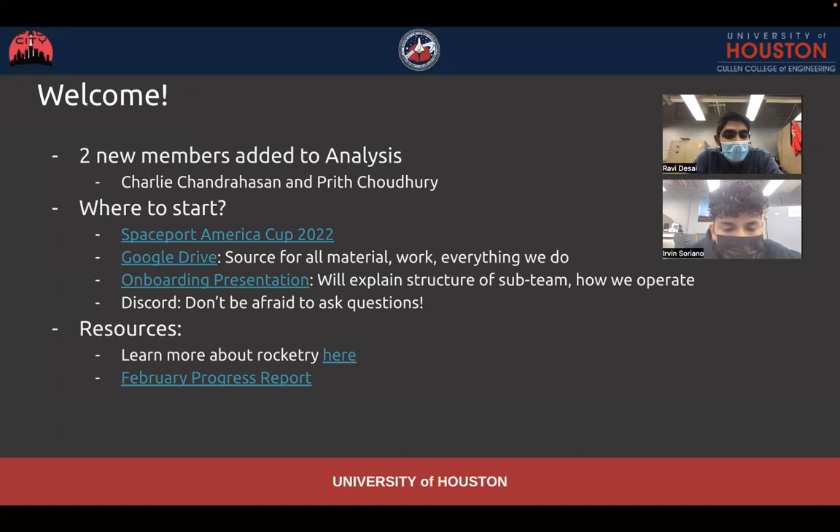The link to the Google Drive is here on the presentation - it's the source for all of our material, work, and everything we do. There's also the onboarding presentation I gave last semester, which goes more into depth about the structure of the sub team and how we operate. It's a little long and some info isn't accurate since it was so long ago, but if you're wondering how we work and get stuff done, it's a good resource.

And then obviously the Discord - please don't be afraid to ask questions. I know when I started, when Irvin started, when all of us started, it's good to just ask questions even if you think they're stupid. Don't be afraid, and we'll answer them as fast as possible.

Some more resources: I found a website, thanks to Gustavo, just about rocketry in general, with as basic or as complex explanations of things as you'd want - it's linked on the slide. And then the most recent February progress report, so you can see the recent tasks we've been working on and read about what we've completed from our PDR up until now.

Also wanted to quickly talk about our split up of analysis. We're currently split into two sub teams. The first is the design team, whose main responsibilities include CAD, FEA (finite element analysis), and CFD (computational fluid dynamics). They'll be focused not on learning NX and FEMAP anymore, but on learning the theory behind FEA.

And taking care of all the related tasks that come their way. The validation team is kind of a catch-all for everything else - they're working on apogee simulations, system validation, and occasionally mathematical models. Mainly in charge of OpenRocket, and as I'll talk about later, RockSim. Anything else that comes to mind for the team falls into validation.

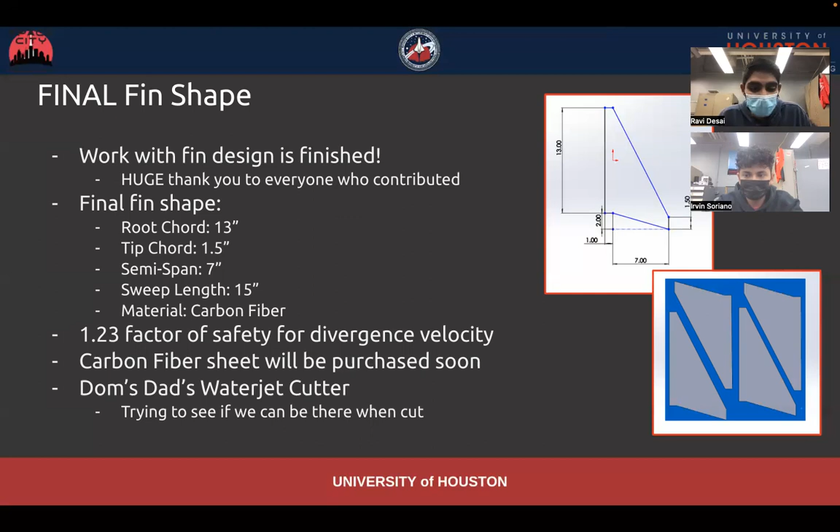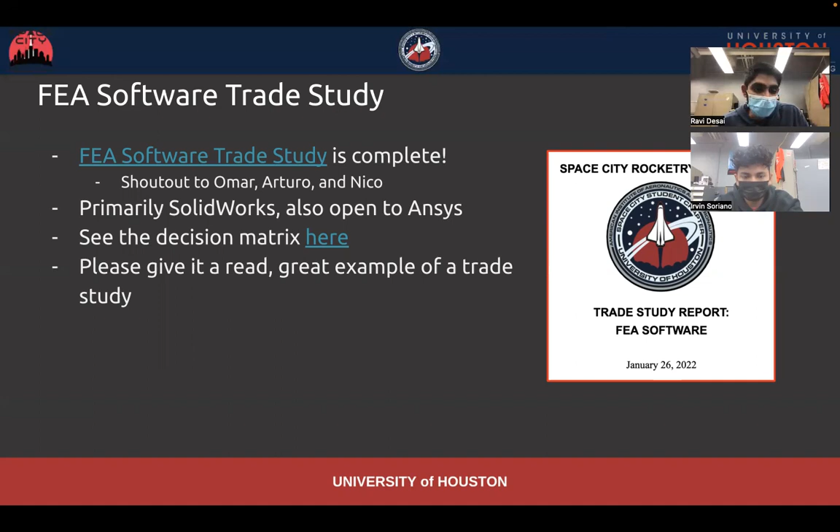If you could give it a read, that'd be great. It's a good example of a trade study, especially for Charlie and Prith if you're interested. I think that's a good place to start. Now moving on to some of our upcoming tasks.

I've split it between our validation and design team. On the validation side, we have the Zenith questions and data sheet along with the RockSim Zenith file. For the design team, the CFD projects, the recovery detailed CAD - finally got word back from Carlos - and then the fin FEA, the landing force and launch, which I'll go ahead and talk about all of these in more detail.

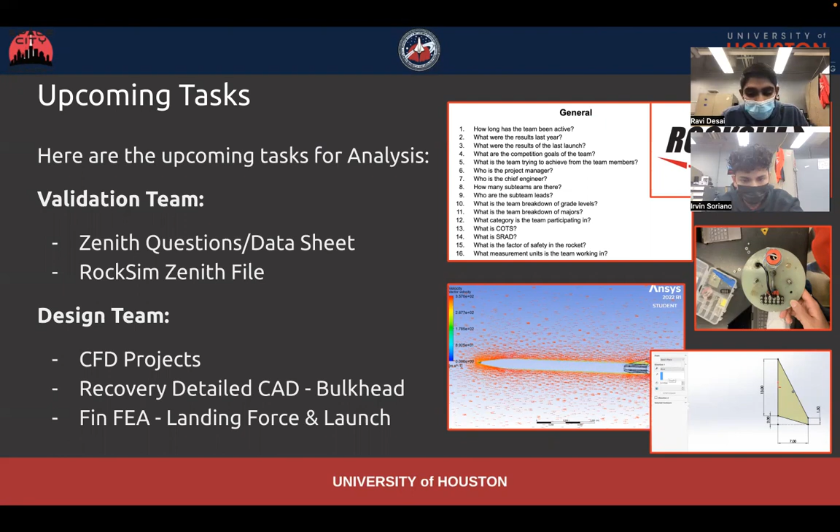So we not only need to understand all of our analysis and what we have done, but also what all the other sub-teams have done, developing a comprehensive understanding of where Zenith is.

I do need to go through and create more questions relevant to analysis, because if you look at the doc now - which I'll send in the Discord, I forgot to link it here - there are a lot of analysis questions from last year more relating to data collection and sampling, which isn't really our responsibility anymore. So I'll talk to Goose and we'll see if we can get more relevant questions, and I'll come up with some as well.

But Will and Amy, if you could take care of this, that'd be great. I know it's during spring break, so I don't expect you guys to be getting work done, especially after all the work we put in throughout the semester. So I think two weeks after spring break ends, if we could get all of analysis done and then start venturing out into other sub-teams and offering help there as well, that would be great.

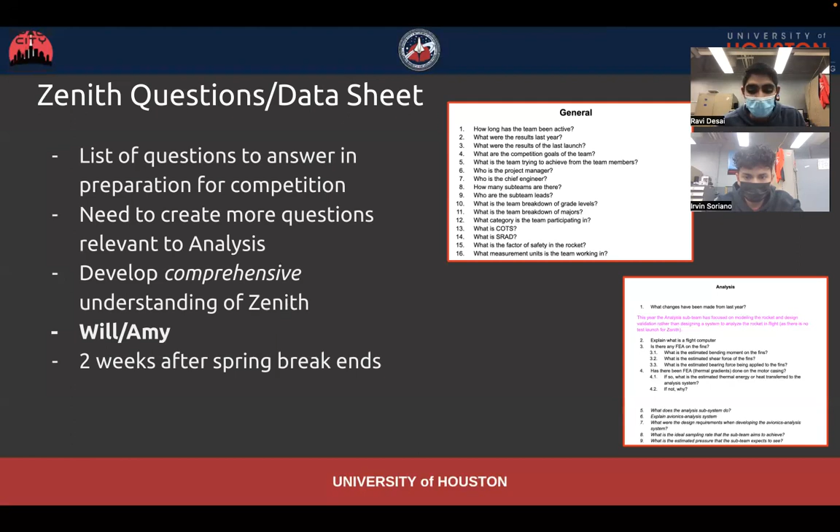Now the RockSim Zenith file - as you know, our OpenRocket file is almost finalized, and the only changes from here should be based on how the parts fit together. I know once we start physically assembling things, there'll be minor changes here and there. Hopefully nothing too crazy. So apart from making those changes, the OpenRocket file is pretty much done.

Now we need to shift our attention to RockSim and develop a corresponding RockSim file. This will offer us a good comparison of values, hopefully more realistic than what OpenRocket can give. The computer in the lab does have RockSim installed, so when we do get in the lab post spring break, we can start working on there.

I think there is already a RockSim file with the boat tail, but there are a lot of things that are different on there. So just touching that up is really what we need to do.

Something for us to look into is really the differences in the simulation results that we get, and then looking at what paint finish, the different fin geometries, and the boat tail do to our apogee and stability - things like that will be really interesting to see and good to have as a comparison, so that when we go to Spaceport, we're able to confidently predict we're going to reach this height or this apogee because of these factors, and we used multiple softwares to confirm this.

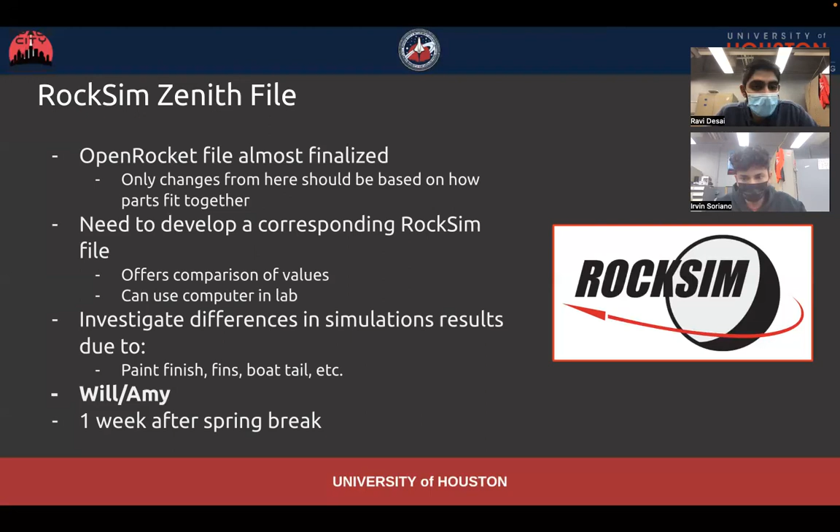Now moving on to our design team, starting with the CFD projects. Now I know, Nico, you've put in some good work already. I'm just not too sure what exactly you've worked on yet, so I wanted to outline some of the major analyses I wanted to see.

The first being the nose cone analysis - looking at different types of nose cone profiles on Zenith, and then just validating our decision. I believe you started work on that already because you were asking some questions in the Discord.

Yeah, that would be great if you could continue to work on that. And then the boat tail validation—I know way back when you were introduced to the team in the library, we were talking about having a simulation with just the standard flat end with how Oberon is versus our boat tail. So that side-by-side comparison will be really good for the tech report and our justification for the decision to use a boat tail on Zenith.

And then I wanted to ask if you had plans for the surface roughness analysis, because it's a huge part of our apogee impact with OpenRocket, and I'm sure it will be with RockSim as well. So being able to see how different surface roughness values impact apogee using ANSYS would be great.

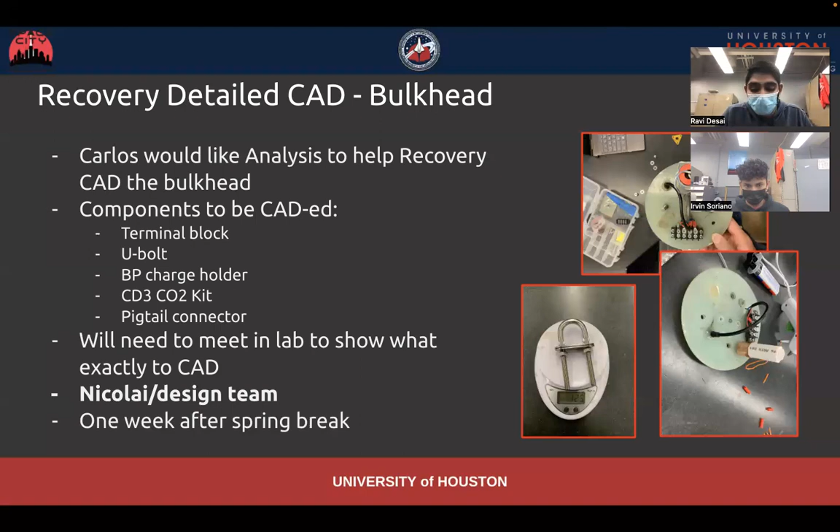Lastly, the Fin FEA is something I've just been recently thinking of with our finalized fin decision, but I wanted to see if Omar and Arturo, our FEA kings, can simulate the landing forces and also the launch conditions, because I know it'll be constrained differently since we'll have a different MMM and a completely different setup to Oberon.

You will have to wait, I think, to complete the launch analysis just for the MMM design so that we know where to constrain the fins and how it's all going to work together with the lower airframe and the boat tail. But for the landing forces, I wanted to ask if the hand calculations from the boat tail FEA are accurate enough, because I know we had some debate about the validity of the results we found there. So I think verifying those, and then maybe testing a carbon fiber fin in SolidWorks, just like we did the boat tail, would be perfect.

So the landing forces shouldn't take too long, but because the MMM design is still up in the air and to be finalized, one week after the final MMM design is submitted, I would like for all of this to get done. And then don't forget the corresponding analysis report—it doesn't have to be too long, and you can actually auto-generate it on SolidWorks, so that shouldn't be too bad.

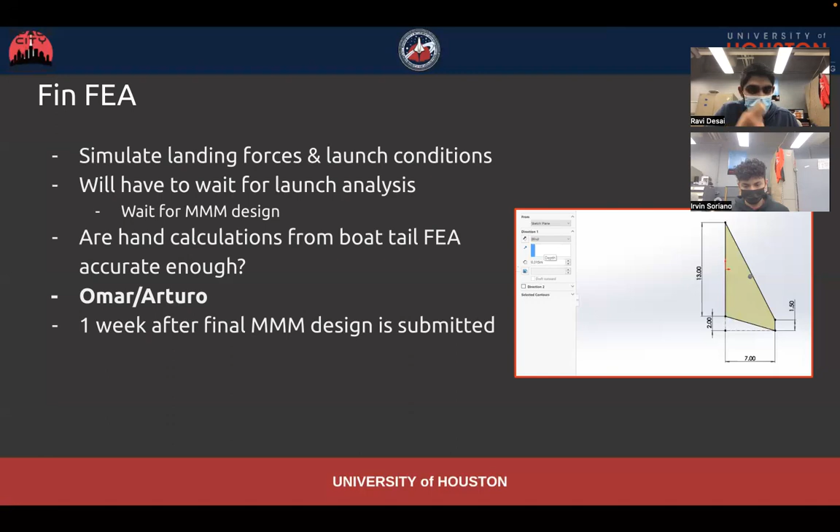But that was everything. So if you do have any questions, feel free to shoot a message on Discord or reach out to Irvin, Gustavo, or I, and we'll be sure to answer any of your questions.

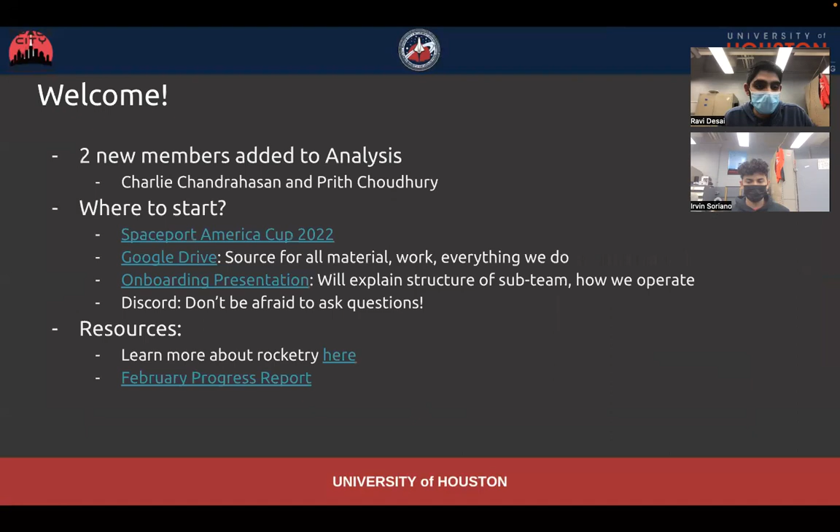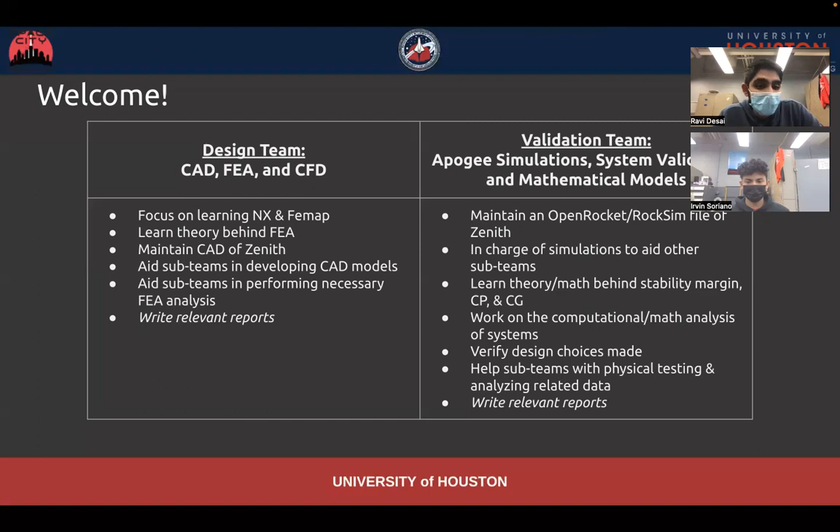I think one thing I forgot to cover, just for Charlie and Prith—think about which sub team you'd like to be on. If you're not sure and want to get a taste of both, that's completely okay. You can take on some projects or help out behind the project for each of the teams so you can see what you like, or what you want to learn more of before diving into it. The teams are pretty flexible—if you're interested in something, you can move around. I don't have an issue with that as long as we have somebody being responsible and taking care of the work.

Yeah, I think that was it. Excited to work with you guys—I know you've been doing such a great job, and really excited to see all of our work come together at competition. I guess I'll see you guys after spring break. Thank you.